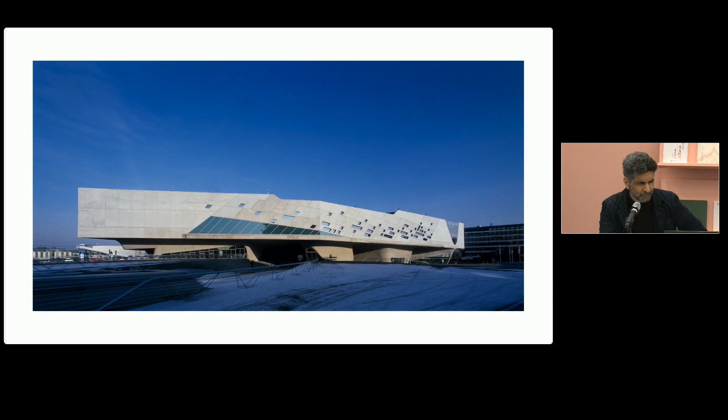A change did occur, and I suspect it's still prevalent, where our form-making abilities in the software went beyond understanding what the structure was, or is, or should be. Engineering-wise, those relationships in some respects divorced, so we had engineers effectively telling us: whatever you design, whatever form you design, we can make it work, we can make it stand up.

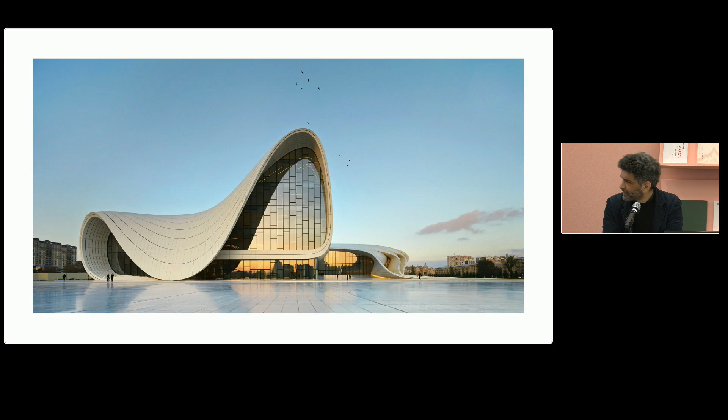I don't want to say I found it intriguing—I found it, dare I say, the beginning of something slightly problematic, in that we could achieve pretty much anything we drew. It didn't matter exactly what it did. If Hanif was here I'd tease him about it, because you can see on the next slide, we would create these fantastic structures, and sometime down the line would come superstructure and substructure that would then hold up the external and internal skins.

By that stage, it was already too late to integrate the superstructure. So you can see there, the superstructure is actually quite fascinating, but the skin has absolutely no relationship with it. In fact, a giant piece of substructure is already strapped onto the outside and the inside to hold up a skin that was never imagined as being part of that structure.

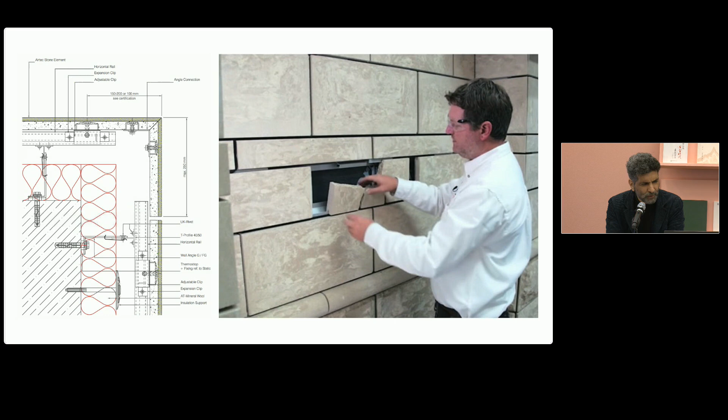All well and good—you scratch your head and think, well, that's the future, it's all possible, hooray. And you begin to realize that's pretty much everything, that's how we build today. Whatever form we create, even if it's meant to have a sort of historical illusion, ultimately they are skins suspended from superstructure.

Various offices I worked in after graduating also did this sort of work, and London is full of it—allusions to the past where there's a complete lack of knowledge, a forgetfulness. I'm not even sure we ever knew the information to forget of why those forms existed in the first place.

So the idea of tectonics driving the form. These are meant to allude to Victorian and Georgian 'warehouses,' really just clerks' offices, where the brick, stone, and cast iron, the performance of that structure, would have driven the size of those lintels, the spans, and therefore the form of those buildings.

But now they are just drawings—drawings that somehow are meant to represent or allude to the past. And as architects, we make beautiful drawings. They're effectively wallpaper, and some of our students will know I constantly criticize our profession as being highly indebted wallpaper artists. I've spent too many years in that training without understanding what the structure is behind it.

We create beautiful drawings, and they're suspended from structure. You can ask yourself, does it really matter? What's the problem, I mean?

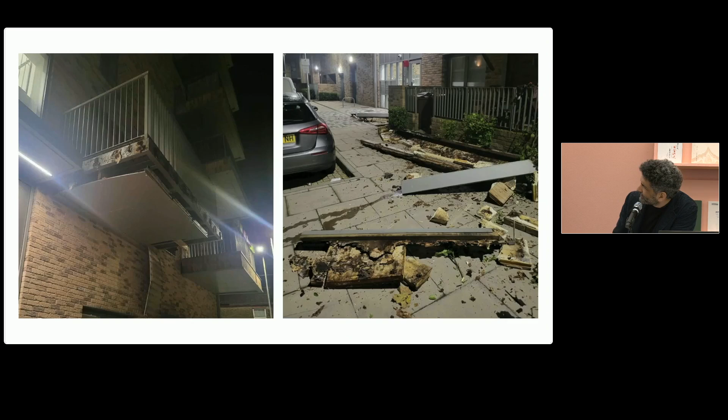Certainly this sort of thing—this is bits of brick plastered along, so you see from that previous slide, while 100 years ago, simply brick and stone would have held up that entire building. We're now creating superstructures in either steel or concrete and having to bring the brick from top to bottom. Sounds prosaic, but this is ultimately where I'm heading: we've forgotten that these bricks can hold up the entire form, the entire structure.

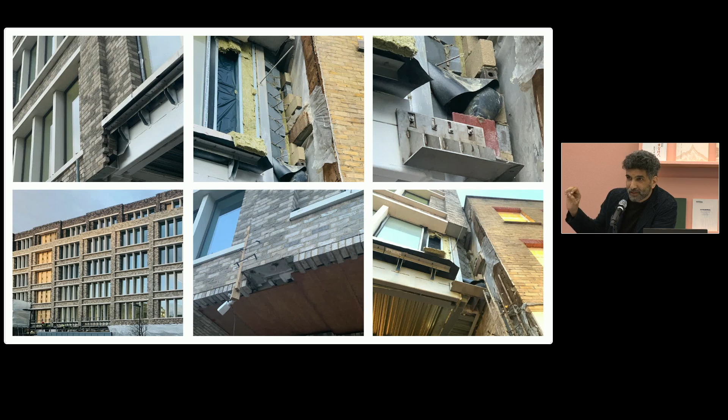And this is the origin of all architecture—the tectonics, the materials that architecture is made of, the stuff that we apparently draw beautifully but forget has mass and weight and structural ability, let alone its poetic outcomes.

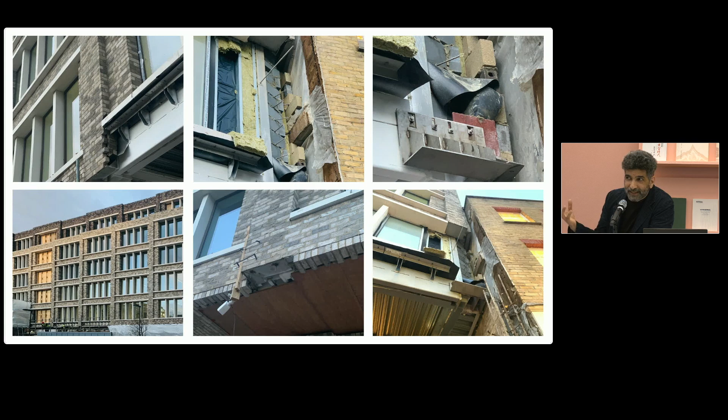And then these sort of things happen where balconies—the slab edge of the balcony—have actually been plastered with bricks, handed over to a subcontractor to build because the architect drew it beautifully and got it through approvals. The subcontractors then ultimately put it together in a manner that's clearly going to collapse and injure somebody. Obviously we've seen all sorts of other outcomes in the UK.

So it begins to suggest ethical outcomes. You begin to question: what does it matter? Who cares how it's built? Ultimately it looks beautiful, it's got approvals, everyone's happy with it, the townscape looks pretty—but are there any ethical outcomes to this?

You'll know that Richard Sennett was taught by Hannah Arendt, and the difference between the two is ultimately that Sennett believes your ethical purpose is in your making, your skill, your abilities—specifically for us as architects, that you'll be highly skilled, but ultimately you still have ethical purpose. You should have ethical purpose. To what end, otherwise, is this training? Is this skill development?

Ethics are laws. We negotiate them between us and turn them into laws, and some of them are legislated and some of them are not. They're fairly straightforward: structural integrity, fire safety, and so on and so forth, and of course, most urgently today, embodied carbon. The appearance, the style, is one of the least of it, because we don't necessarily have any ethical reason to challenge or negotiate with ourselves about how we dress, how we look, what our haircuts are, and so on. So it's the last thing of all the priorities we should be negotiating.

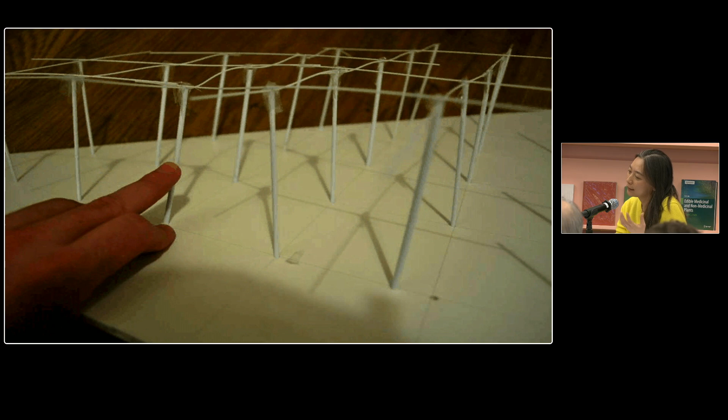So the first project we really used as a way to announce our practice was this PS1 competition that we won in 2010, the year after we started our office. It's called the pole dance. Here you can see that the poles are not the only thing—the system is not something that only becomes unstable through human interventions. It becomes elastic, but it's also inherently fragile, inherently unstable, and inherently indeterminable.

So it's a very simple installation. It consists of three elements: a surf mast base that's cast rubber with PVC pipes, and the poles as the column—the beams are this bungee cord. So all systems have this elasticity built into it.

And we worked with Buro Happold, asked them to calculate at that point the elasticity of the system, and they said it's uncalculable because the whole point of engineering is trying to take out as much unknown as possible, but you're asking us to do the opposite. So if we have a quantum computer, maybe we can do it.

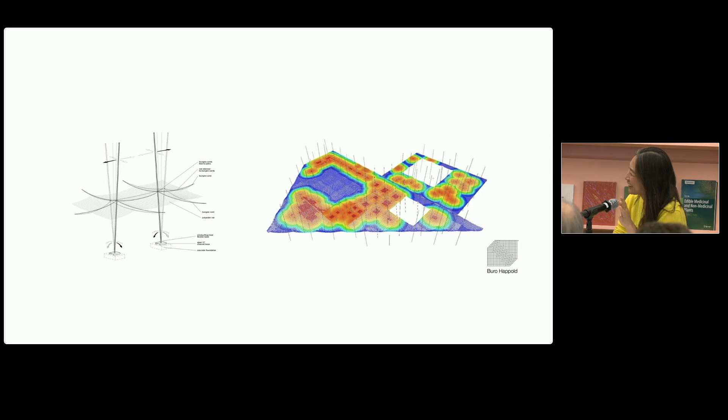So in the end, what we had to do is fake this very convincing looking engineering drawing of the stress test and present it to MoMA, but it's completely fake—to show them that, don't worry, the whole forces will resolve itself. But obviously, it's also a moment of playfulness, of defiance against this reality that we all find ourselves in, and not being crushed by it, but still instilling some kind of optimism and joy into the practice itself.

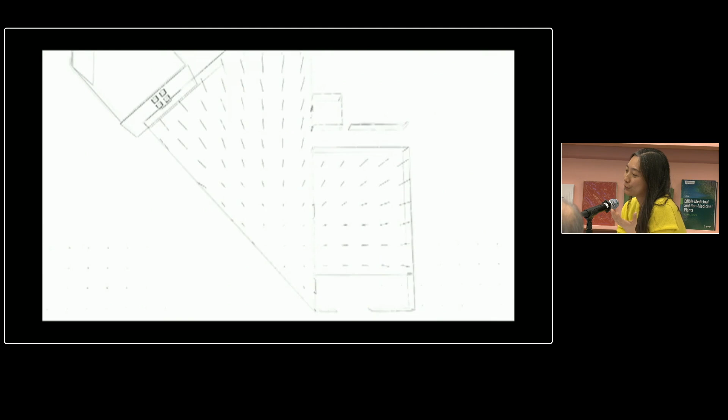We went down memory lane and looked at a lot of the renderings and videos that we produced, because as you start your new practice, it's very important to also find your own aesthetic language and representation language. So this was the early animation that we produced, and looking at it, it might not be very impressive to you now, but it was quite advanced at that moment to make this pole move, and a yoga ball fall from the sky.

These images were also to kind of find the aesthetic and the effect of something that's indeterminate and something that's not stable. Just how to visualize that was a problem that we very much thought about in representation as well.

So there are a few very elemental ingredients, and I already talked about three. The pizza is the next one I want to introduce, because it's impossible to construct this system with machines. None of these individual poles can stand on their own, so you have to hold them in place, then string all the beams, and then add the mesh together.

So we had to buy a lot of pizza for the volunteers to hold them for hours and hours while the whole system goes up, right? So also just thinking about such a simple elemental thing will create a lot of pushback and troubles that we have to solve. I think you're going to talk about the troubles you ran into with your project, right?

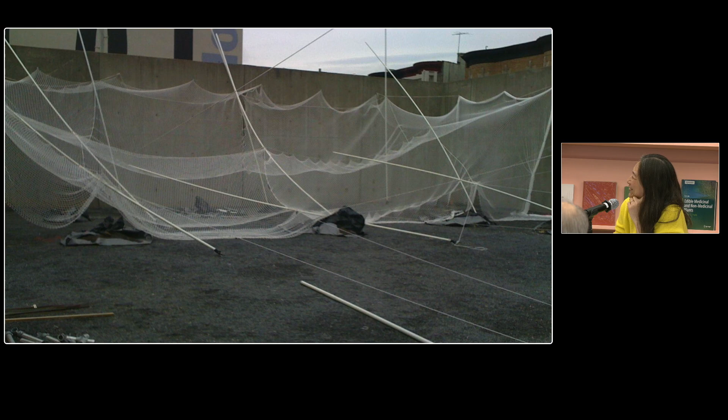Of course, it failed many, many times, and we had to buy more pizza in order to construct it again. Eventually, after probably 3 or 4 tries, we found the right way to put it all together. And the yoga balls have a really important function, because they delay the movement and make the whole movement not derivative of each other—it introduces another element of complexity into the whole movement of the system.

So it became really, really fun, but it's also an important first project to really think about what our role is as architect in the age of 2008. As a young person, you want to go way above and beyond, and with any small project you want to do more. So a bunch of other projects spawned out of that. We made an app, we made a drawing contest, we tried to engage globally, and a lot of graphic design and interactive design was experimented with as part of the project.

Thanks. It's quite odd, isn't it, jumping from one to the other? Okay, have to reorient you. Exactly, I have to reorientate. So we left. Well, actually, as Grace points out, it's funny, isn't it? You forget.

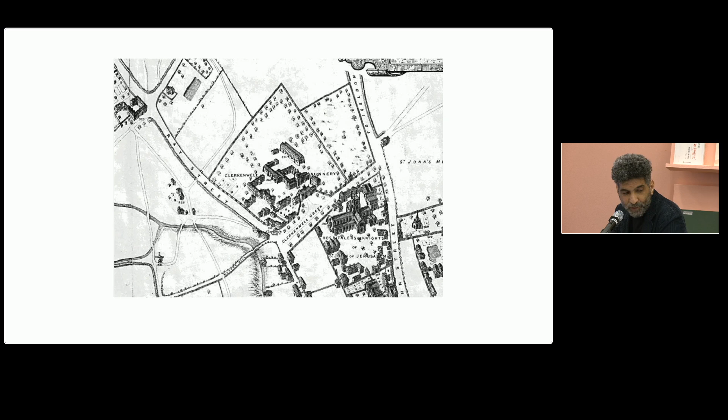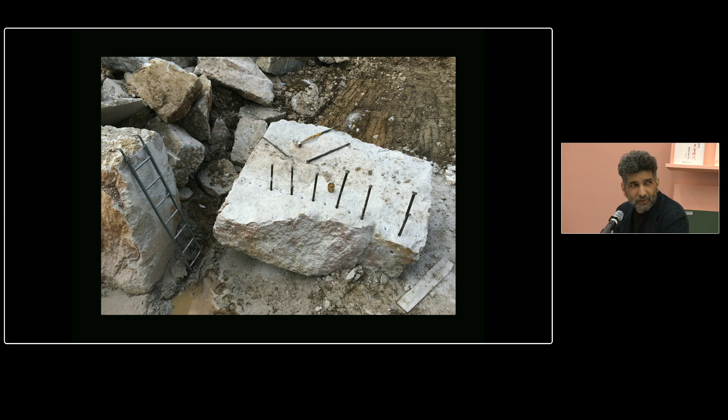Well, there are some ethical questions, and we can discuss that later. As soon as you hang a material from a structure, the structure has to get heavier. Typically, if you're hanging brick or something heavy, the structure is getting 30% heavier overall. That's obviously more material. What does that matter? It's more cost for the client, but it's more embodied carbon you're burning. And we ask the question, well, why are we doing that? Why are we still doing that? And of course, there's a long history of that. We can discuss that later, but Bötticher and Semper had exactly the point of crisis in the early to mid 19th century, that we're just drawing. Architecture had already been divorced from understanding our materials, and we're just drawing. Why are we drawing this stuff? How's it held up? And do we care about it? Does it matter? So these things are perennial, and they will remain perennial as long as we're not educated to understand the material properties, structural properties, and so on.

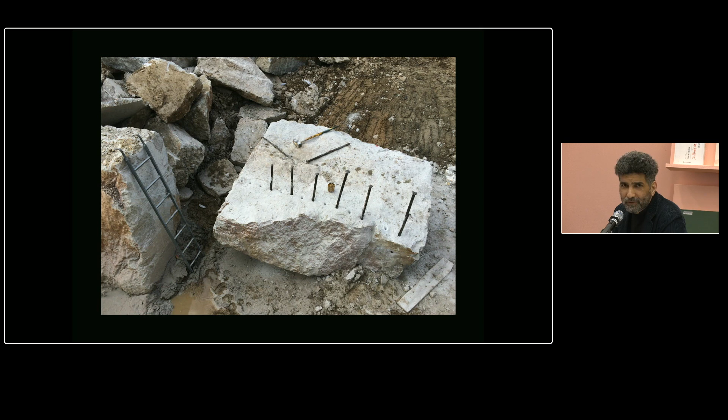So we decided to try and educate ourselves. Why are we building stone on steel and concrete frames as a veneer? Is that the most efficient, cost-effective, greenest way of building? And of course, the answer is no. It turns out we just forgotten how to build in stone. None of us visit quarries. We went to visit a quarry and quickly found out this is how it's dug out. These are the basic methods of cutting, drilling, splitting limestone, within which you find quartz pockets, fossils, and so on. But none of us know that because we tend to see it via salespeople giving us samples of small bits of limestone.

I realized, okay, fine, so we understand that it's cost-effective, structurally possible, and the dressing, in other words the contemporary way of using that limestone, can be as it's found in the quarry. How does it work structurally? Well, it looks complex, doesn't it? But this is a lot simpler than putting up a steel frame and cladding it.

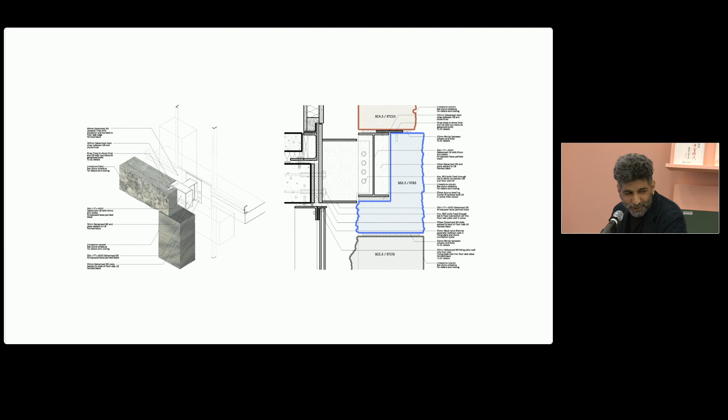We tested that, and you can see that as a form of exoskeleton, leaving the interior as what the 1970s termed loose fit. So there's no columns on the interior. You can do what you like with it over the years, turning it from residential to smaller residential units, hotel, office, and so on.

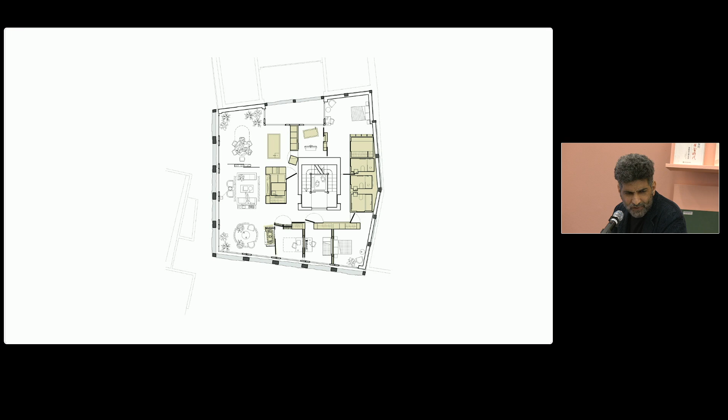And the interior then is entirely timber. So it's decisions on what those materials can do, not just for structural purposes and their longevity, but also their cost, and ultimately their poetic outcomes, specifically at ground floor level, the tactile areas, the things you touch, what Edward R. Ford might call the autonomous detail, as opposed to the articulated.

Climate. We're all now more than ever conscious of the impact of the construction industry on climate. Roughly 40% of annual emissions are due to us, in terms of what we specify, how it's built, how it's operated, and how it's reused or demolished at the end of it. That's 40%, quite significant.

Most of us would say, well, me as an architect, I have such little impact, such little agency, especially if I don't understand the nature of those materials. I've done a beautiful drawing, and the other consultants, the structural engineer and everybody else, are specifying them. It's them. Well, this is our argument about educating yourself.

There is something called the BSRIA University of Bath Inventory of Carbon and Energy, which lists all materials typically used in construction. Unfortunately, it lists them as kilograms of carbon per kilogram of material, not much use to any of us because we don't tend to work in kilograms of material, but we do work in volumes. It's not very difficult to convert mass into volume.

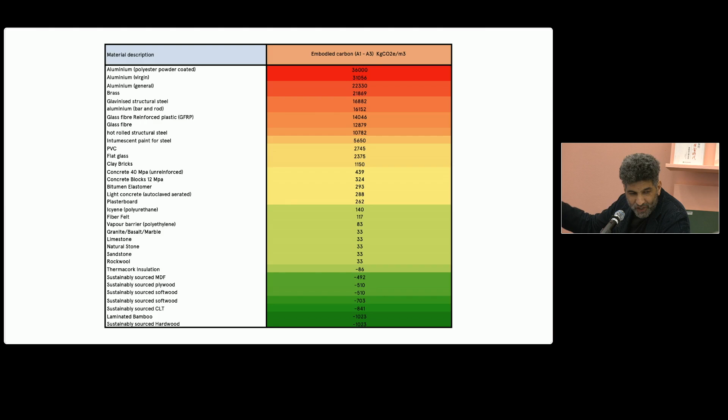So what we learned on Clerkenwell was then applied with that traffic light system on Finchley Road, which is twice the height. Instead of concrete and steel, where we could replace more of it, we did so mostly with cross-laminated timber, and then stone as well.

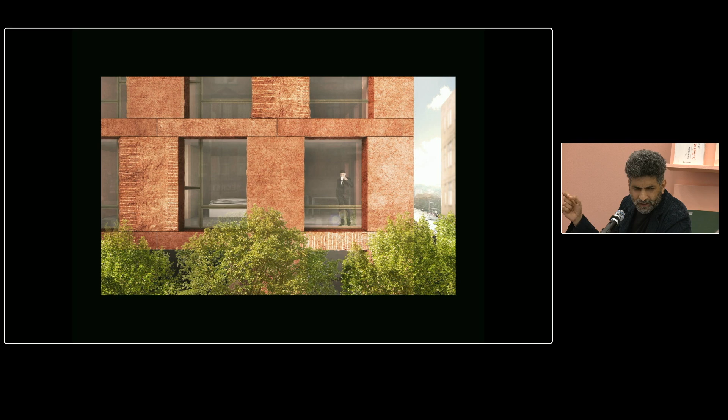Operational is about 43%—this is 2017 data. Every year, operational equipment becomes more efficient, which it does. So it's more and more important, the materials you choose.

Your early specification is why it's so urgent for you guys to learn about those materials, so you become—ultimately—you get agency in the choice of your materials and the outcome, and therefore the embodied carbon.

Now imagine if all of us had that thought experiment with that traffic light system of materials, and we all built in timber, 100% timber. You might have noticed, hopefully you have—I'm going to flick back again in case I haven't made the point clear—can you see at the bottom, the green has a minus on it? That's because timber is carbon sequestrating, as you probably understood from your forestry studies.

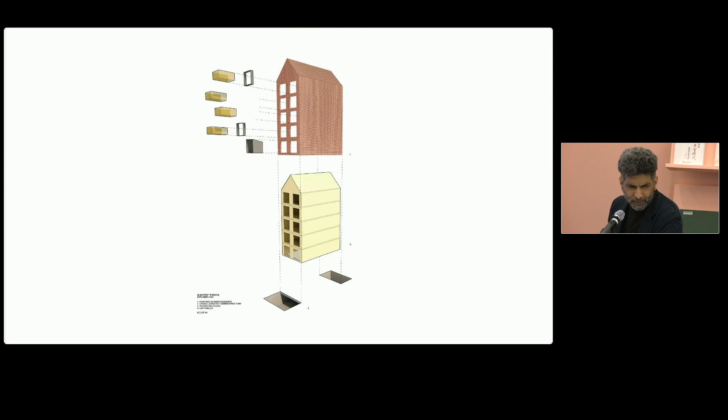So I'm labouring the point about getting yourself educated about materials for all sorts of reasons. Here's a brick version that's carbon negative, where the superstructure is CLT and the brick aims to be as low in its embodied carbon as possible. I'm going to race through these slides because I am labouring the point.

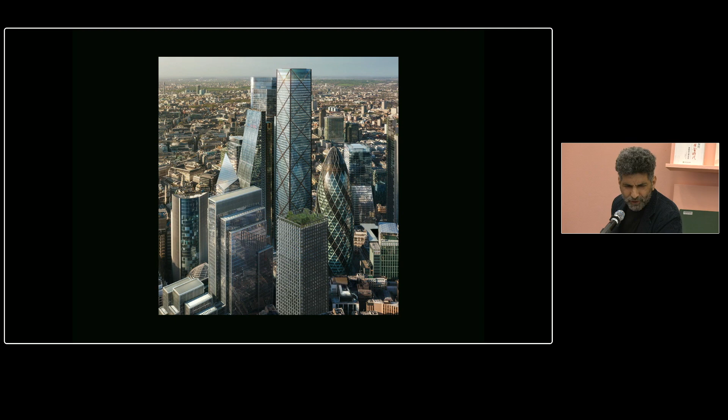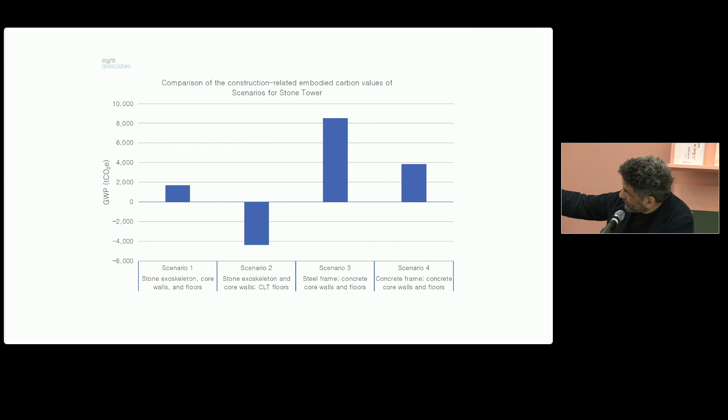Canary Wharf actually asked us to do a study: can you build a tower in stone just like Clerkenwell Close? We hadn't tried it. With our engineers, sustainability engineers and cost consultants, we found we could. If you look carefully, on the far end is an all-stone version - the floor slabs, the columns and walls, everything is stone. Its embodied carbon is a lot less than the steel version, the steel frame, second from the right, or a concrete frame version. But the one that's gone negative is where we've put timber floor slabs in - cross-laminated timber floor slabs and internal partitions all in timber.

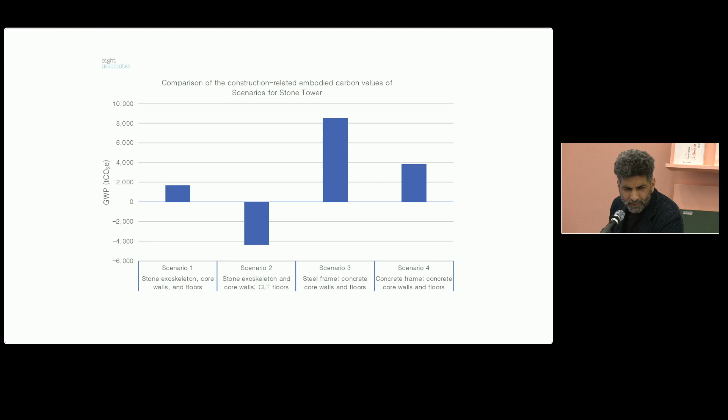So there's a demonstration that if you're careful about your choice of materials, you can get the same outcome in terms of your building form, whatever illusions you're after, but it's carbon negative.

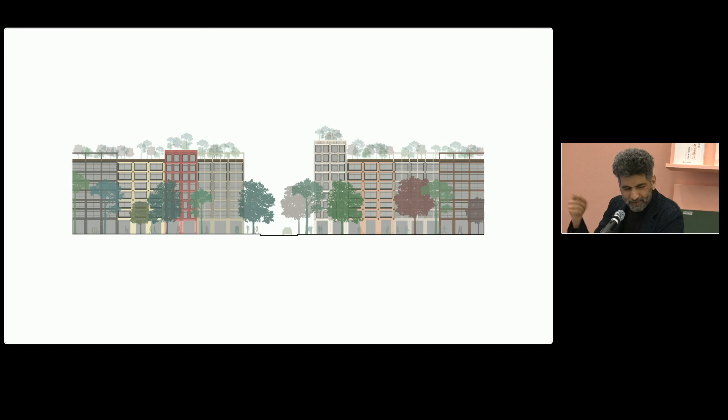What we find again - I'm going to race through these because I'm conscious I'll end up swallowing too much time - this isn't our work, but we get asked by, because you develop a level of expertise, significant developers, larger scale developers, what can we do about our master plan?

So we suggested, look, at the moment you're getting BREEAM Platinum, the highest possible level for your office buildings, same with the residential buildings on sustainability. But you're still building exactly as you did 30, 40 years ago. How the hell are you getting BREEAM Platinum?

Well, unfortunately, you can tick boxes saying, I have considered using CLT. At some point I dreamt about it in the middle of the night - a terrible nightmare, I had to use CLT. I've ticked the box, and that's good enough. Then all my timber doors are actually sustainably sourced - bang, you've got platinum.

Most of us don't have a choice. We hand this information over to the sustainability engineer, and bang, we've got platinum. But the reality is the building is no different, really, from 30, 40 years ago.

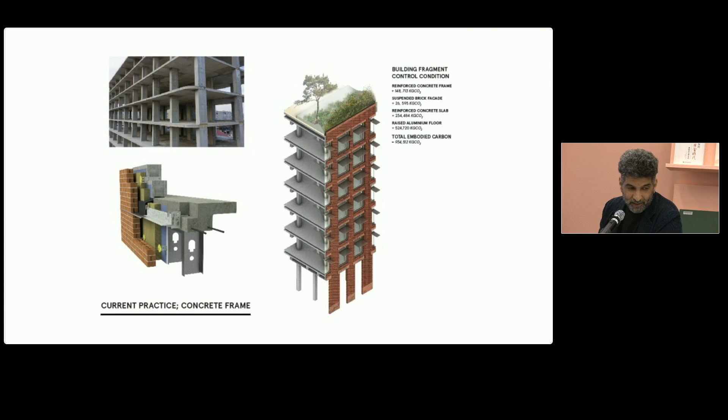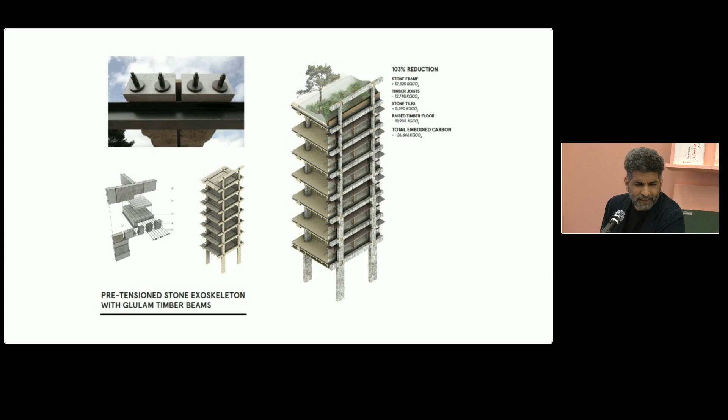So if we make the decision we can substitute those materials for stone and timber in a cost-viable way, because ultimately that's what clients are bothered about. They have to borrow money, and we don't want them to spend twice the amount, otherwise it wouldn't happen - they'll just revert back to steel and concrete. If they can do it, then why not, in terms of cost?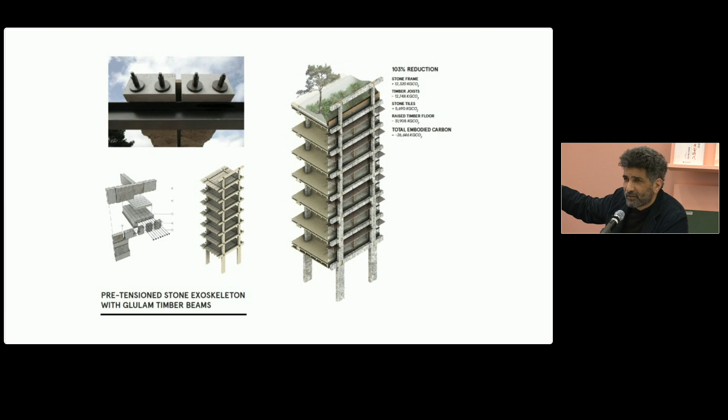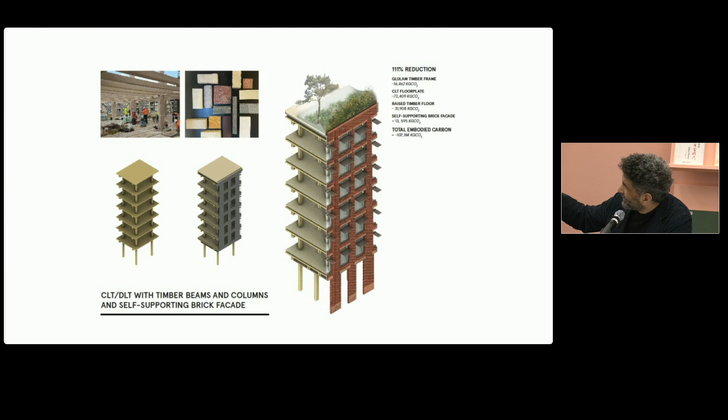You can see the reduction in embodied carbon, where 103% basically means it's now negative in its embodied carbon compared to had it been a steel or concrete frame, and so on. The more timber you use, the better. So that's entirely where the superstructure is actually glulam and CLT floor plates, and then it's a self-supporting brick skin.

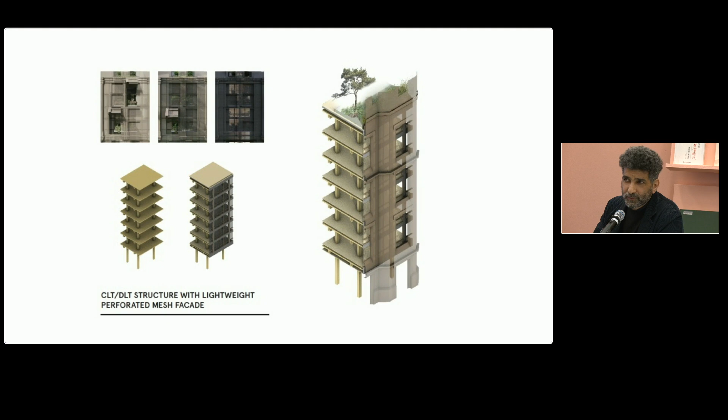So these are examples we give to those developers as everyday architecture. It's not necessarily what we do, but it's everyday architecture, so you can do your master plans and ensure the entire scheme is carbon negative.

That's more of the same, really. Is that you? Yeah.

I'm going to take this a little bit slow because the second stretch of my presentation is still a bit in the past, but a lot of this is about the conversation, isn't it, with the people who make it - like your stone supplier who didn't even know what the matrix is of the materials he's been dealing with all his life - and talking with clients, developers, urban planners, and so on. So if we want to change anything, conversation is probably the most invisible but most important ingredient in that project.

This is maybe a project where we started to realize that those kinds of conversations are the most important ingredients to push the boundaries of architectural technique and expression. And I had this logo on - I don't know if any of you can recognize this at this point, but it's Alibaba.

So this is a project that's also defined. The reason I put all these different apps in the slides is also to remind ourselves that we're very much a product of our time, of the tools and the systems that we're born into. And this project was very much enabled by Alibaba, which used to be this enabling platform.

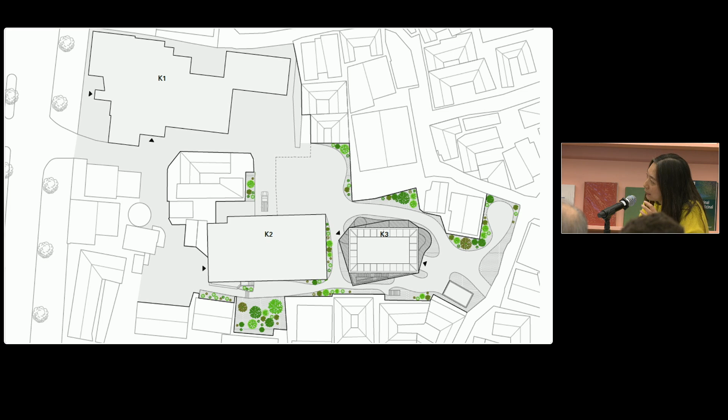The K3, really deep into the historical neighborhood. So we were given the footprint already, and rather than thinking about dressing up this given gallery box with claddings and paint jobs, we thought about how the elemental volumes of the programs—both the gallery as well as accessory programs like vestibule, HVAC box, staircase and so on—

can just be quite matter-of-fact, exist on the site, so that there is no fluff that makes it even consume a bigger footprint. But then, as well, how to make this quite diagrammatic, brutal and crude expression into something that's more crafty—and maybe the form is not something that we find in a computer, and it's not something predetermined, but it's really determined by the volumes of the program and the function itself.

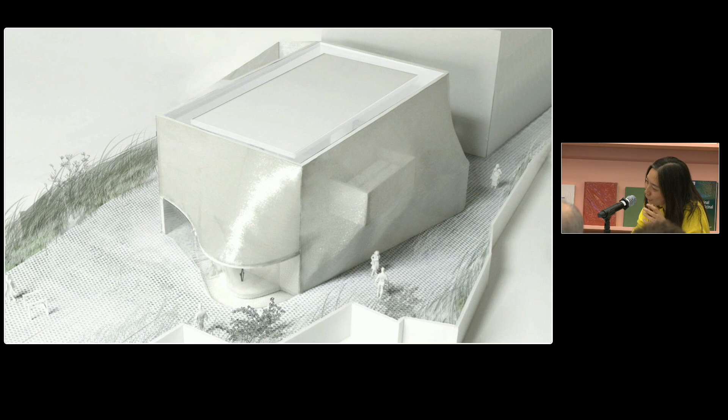So we wrapped the entire building with this chainmail mesh, and this model is made out of stockings. And when we presented to the client, she just literally lowered her sunglasses and said one word: 'I like it, please make it,' without even asking us what it is. And that was the best design meeting we've ever had. But then we were left with the problem of figuring out what it actually is.

This is stocking that becomes an architectural material. So we thought about it really, really hard, and finally this gave us the inspiration that there have been materials like this used on the body of people—something that's quite robust, protective, structural, with potential to be structural, but also pliable and able to adapt itself to the situations it finds itself in.

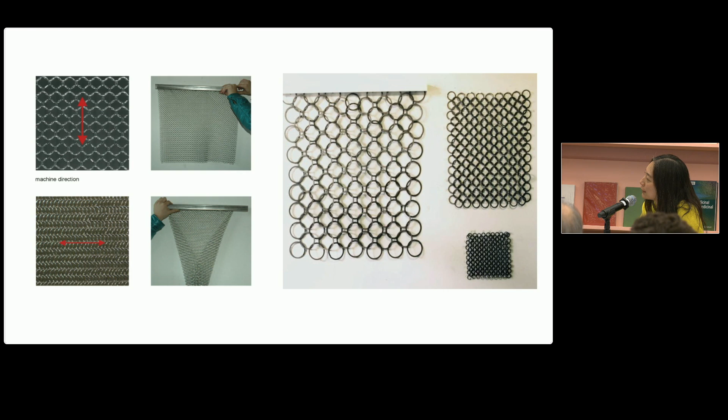Still, the challenge is how to scale it up to a building scale, because this is not something that exists as an architectural material. So we started to make models, trying with cardboard rings to figure out its behavior, its stretchability in different directions. We worked with the facade engineer to really test the behavior of the stainless steel rings, the single rings.

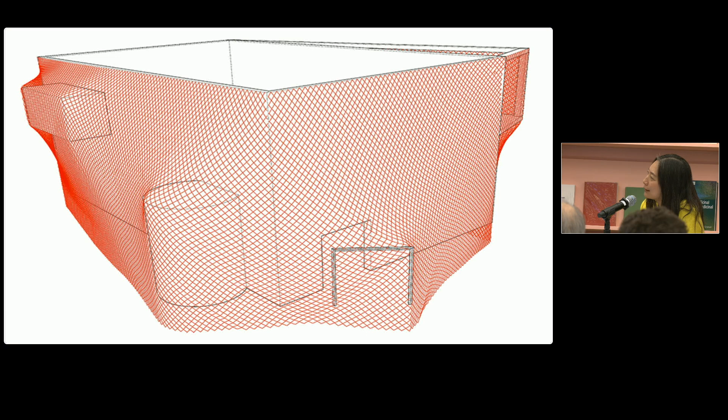And this time, this is actually a real engineering map to figure out the stress distribution over the entire surfaces. And then we understood so much just digitally and informationally what this thing is, but it still doesn't exist in the physical world.

We knew that there is a translation that needs to happen between the digital and informational and the physical. So we bought this really big chainmail mesh, the biggest you can buy on Alibaba from India, from sellers that usually sell belly dancing equipment. They were wondering what we were doing with this big piece of chainmail mesh, but this is a 1 to 10 scale model, the biggest we could produce with the market.

There's no school in the city. There's no hospital in the city. There's only one hotel that doubles as a brothel and restaurant, where we had to spend a lot of time. That's the reality of manufacturing for the whole world, at least in the stainless steel mesh industry.

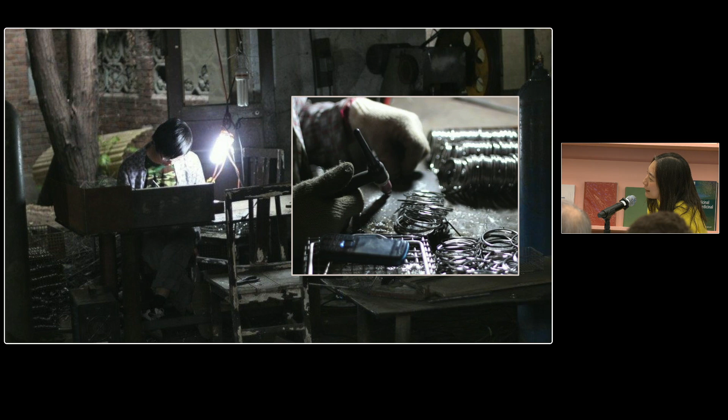And we found that our very promising mock-up, the first mock-up, was produced by this young man who was welding this by himself the whole time.

And then I started to talk to the boss of this workshop, and he looked at me like I'm crazy when I said, we sent you the drawing, this is for architecture, we need 500,000 of this within 8 months. And he said, no, you came to the wrong place. And I said, no, if you guys cannot do it, I don't think we can figure out any other place that can do it. You look around, everyone in this town knows how to weld, and they know how to deal with metal mesh. So why don't we do it together?

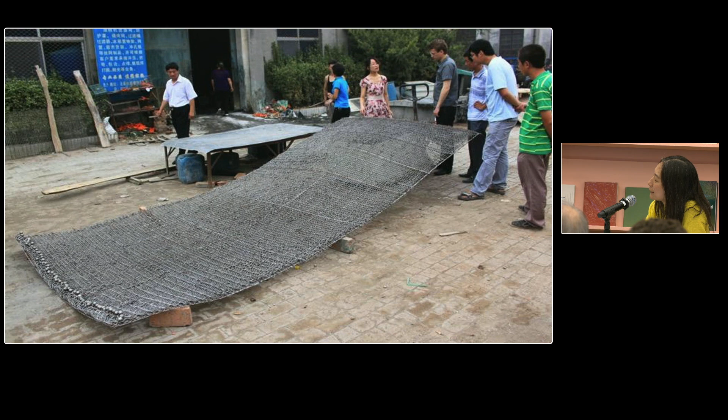So it took us a lot of convincing. And so he got his cousins, his niece together, and probably 5 workshops all got together. And we invented the whole way of scaling up the production of this and quality control, rented the car wash place in town to process the finish of this, and used the local schoolyard to make our first big-scale, full-scale mock-up. And the kids were our inspectors.

And in the meantime, the concrete structure was going up in Korea, so the whole box and everything is just a really simple concrete volume, which is the primary predominant way of building things in Korea. And then we got a lot of the stainless steel mesh arrived on site 8 months after we arrived in Anping.

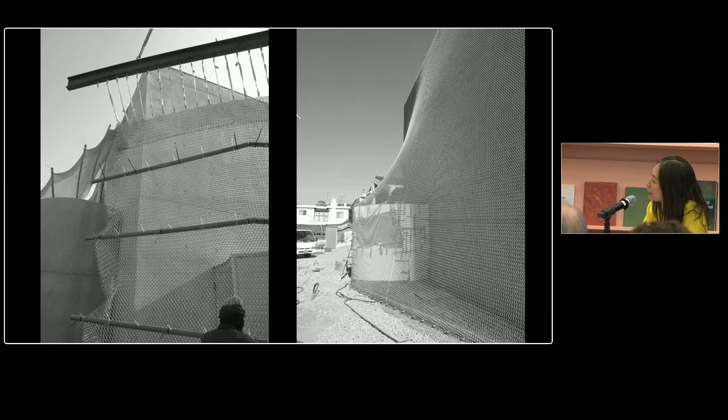And it was one of the coldest days in Korea, so you can see that if you didn't wear gloves, the hand skin would actually be stuck to this metal mesh. So the whole construction, again, meant we had to invent the whole method, the whole way of even installing this.

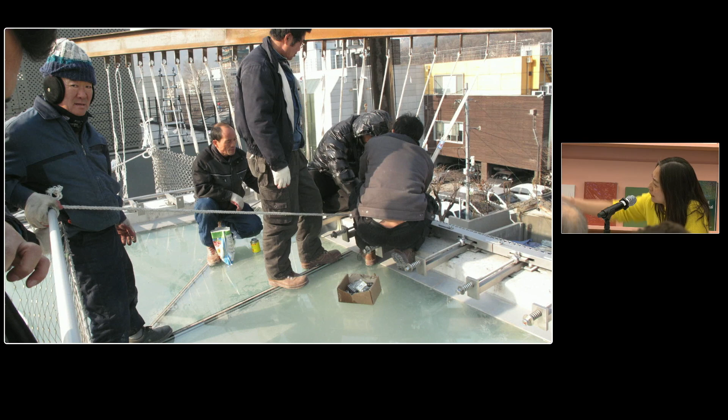This time we didn't need to buy pizza, we just got a crane and stretched this mesh from the top. There's all these springs around the perimeters that you can tension afterwards, after the mesh was anchored and secured at the bottom, and then you tension it at the top, so the entire skin becomes one garment, basically, that is welded on site.

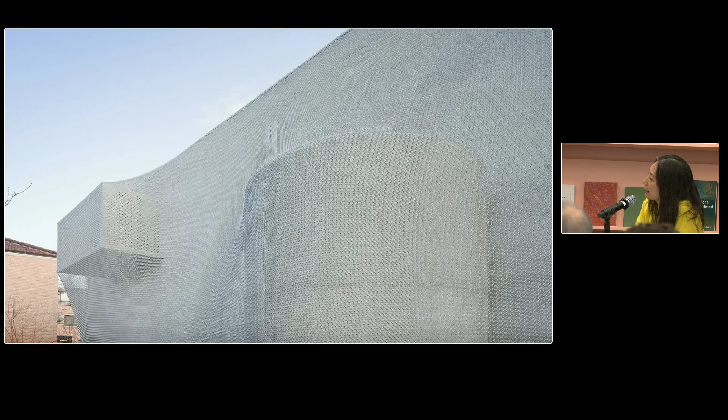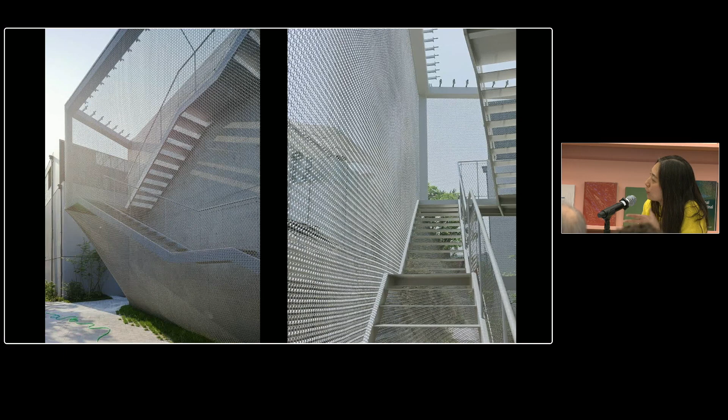There's 16 of these panels that are hand welded on site, but because the way you weld on site is the same way as you weld off site, at the end of the day it becomes a seamless one piece of garment wrapped around this entire gallery space, creating an in-between space between the functional programmatic concrete volumes and the exterior expression.

And there's a handmade quality to this that had a really great dialogue with the Hanok homes, these traditional homes around the neighborhood.

That's rather beautiful. Right, I've got to get my mind around it.

Okay, future. Someone's tied this... this is different uses of stone. The Italian government essentially paid for some research - there's still a big stone industry in Italy, and a vast amount of it is waste as a result of cutting stone into smaller slivers. You get a lot of waste from there, currently in sort of mountainous piles. What can you do with them?

So essentially you can make terrazzo, a sort of form of terrazzo. The expectation was you'd just make tiles out of it and sell it as flat tiles, but if you're actually putting it back together with an agent, essentially a glue, well why not put it across a piece of formwork so by the time it sets, it becomes self-supporting, a piece of structure.

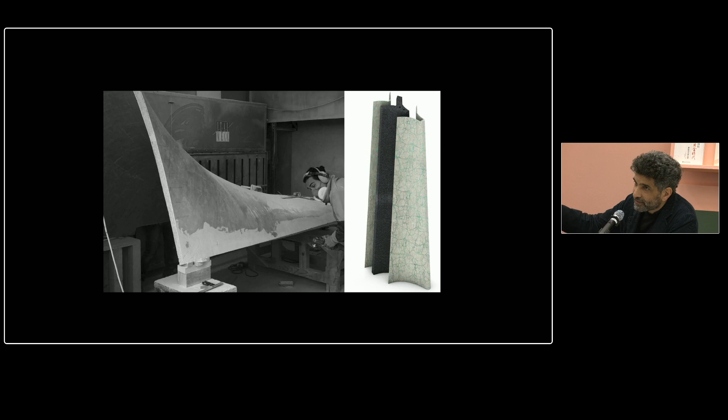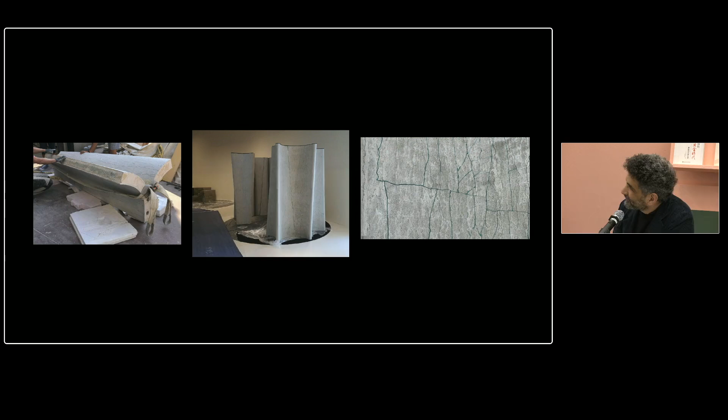So our first attempts - keep an eye that this is two layers, inside and outside, with insulation in between. So it's external finish, internal finish, and insulation in between. I think this actually went to Korea. Unfortunately COVID meant we couldn't go visit it, and then it couldn't come back, so it was destroyed.

But our first attempt went to Venice, which was just a single layer. This shows you that if you put it across a piece of formwork it's self-supporting. It could be its own roof structure, its wall structure, and so on and so forth.

Simple stacking - just taking blocks and stacking them. So the least amount of work you need to do, the least amount of energy you need to spend.

So you can replace all your precast concrete floors, or even metal deck with concrete on top, with pre-tension stone. So it's still - there's metal in it. Remember, we're not saying we're eliminating cream cakes and bacon, it's just about reducing it in the diet. So it's pre-tension floor plates, beams - some of them are sort of 18 meters long.

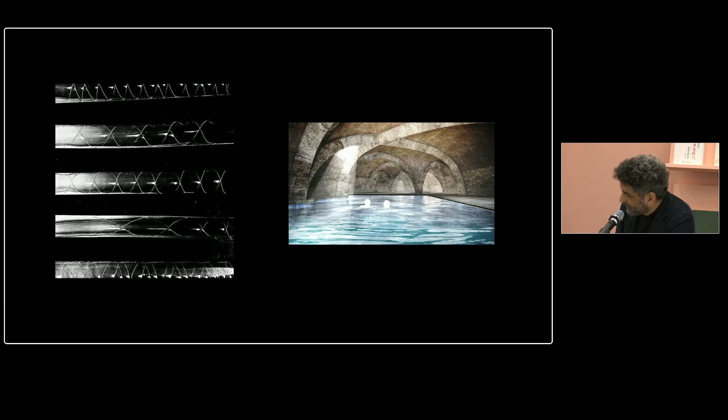But we started off with our structural engineer, instead of using a bit of software, taking balloons and just playing with bits of string to see how what are effectively rib arches behave, with the bulbous areas being their vaults. And that's where that previous technology came into applied reality.

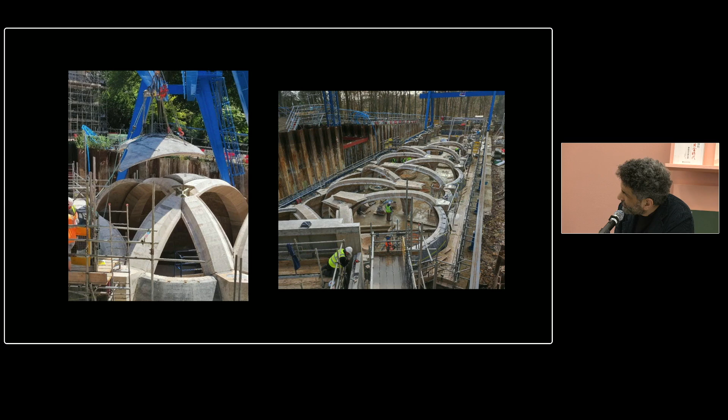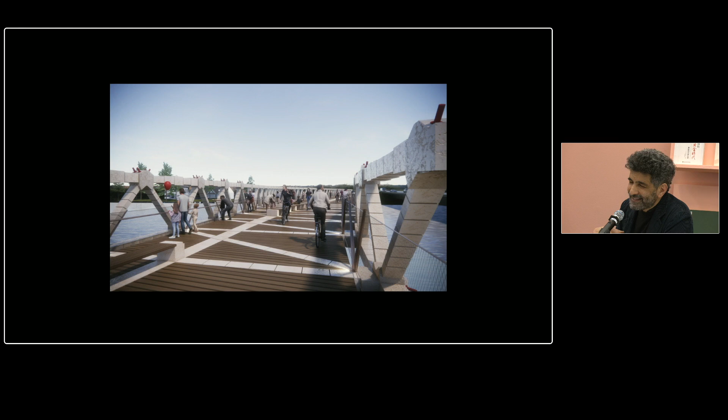We were asked to look at a footbridge, and this is where the stone becomes slightly a bit of a fetish. We were asked to look at a foot and cycle bridge, and you're thinking, well, it's a 90-meter span with 60 meters in the center of it. Is that right? 60, and then I think it was 15 either side, something like that anyway.

Could we do it all in timber? The answer was probably not. Can you do it in stone? Yes, if you pre-tension it.

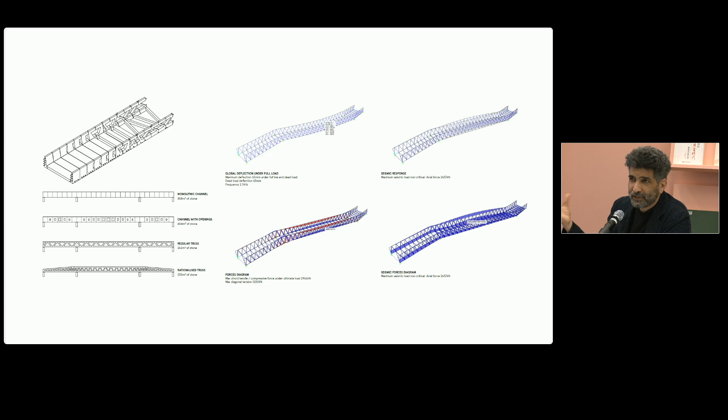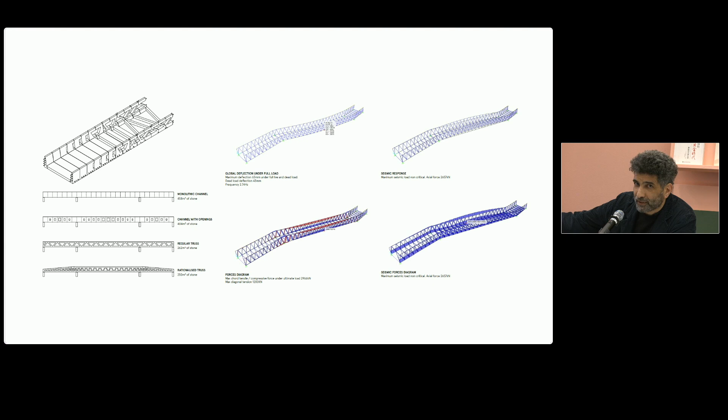And if you look at, again, on the left-hand side, you can see one where it's essentially a U-beam. You have a U-beam structure in stone, but then clearly you don't need all that stone - in some areas there's more stresses than others, so you can remove some of that. And if you take it to its natural conclusion, it's effectively a truss. So we thought, well, let's take it to its natural conclusion and see what happens as a truss.

It is a bit brutal - this is in Graz, in Austria. The burghers of Graz said, a stone bridge? Why is it not steel? Who builds bridges in stone? And you have to sort of scratch your head and point at the bridges that exist in the town - the last few hundred years, it's all stone.

Nevertheless, it was a bit of a challenge for them. And it's got a sort of bend in it, which surprised us. I'm going to take you through a number of... this makes it sound like we just do stone. Not sure why it's all stone.

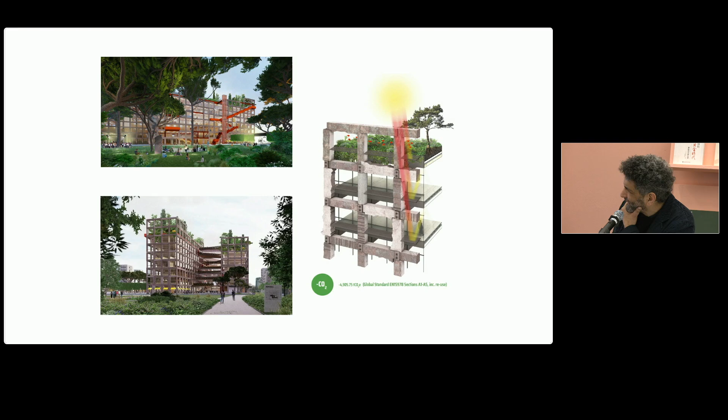A reuse project, where you're reusing parts of a series of warehouses to create this library in Milan, not to be built, unfortunately. It's partly this idea of spolia. If you look carefully, there's found bits of stone as well as new stone, found bits of metal from the warehouses being demolished. We're all interested in reuse now, but the ancients, the Greek and Roman ancients, would have called it spolia. Whatever stone we find from ancient temples, castles, and so on, we reuse for our contemporary purposes.

Here's a non-stone version, a non-stone scheme. This is a site in central London that was bombed and stayed empty until about 5 years ago. Our client bought it and held a competition.

He's very brutal, and said, 'Look, for 2 weeks I want you to come up with some ideas. I've hired Libeskind. Well, hopefully some of you know Tony Fretton. So it's complete opposite ends of the spectrum, and yourselves.' That's nice, and yourselves - I'm not sure what that means, but thank you. You got 2 weeks to come up with an idea. God, this is absurd. But anyway, we had a go.

Notice how it's a sort of weak version of a Palladian villa with a central piece, a wing, and one of the end pavilions that was bombed out. Really, the terraced shops and the shop owners would have lived above.

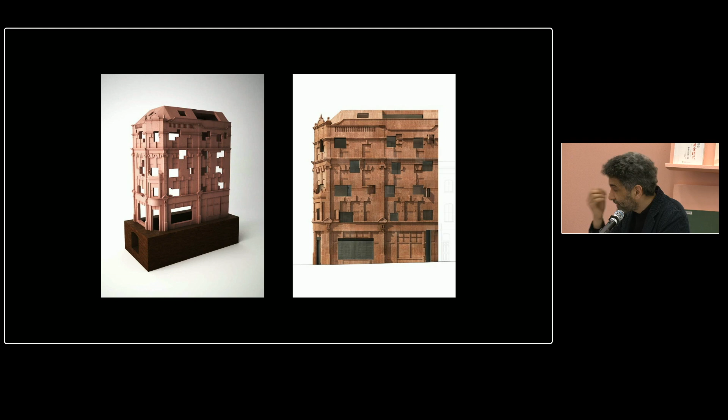It's an interesting discussion on nostalgia. We all have it - I think wherever we are on the planet and whatever age we're at, we have a suspicion that something in the past might have been better. It's obviously a stripping back, isn't it - a stripping back of narrative where, like monument building, you idealize something, you put it on a pedestal. It's an ideal, but it's actually an editing of that reality, of creating a new narrative. And it's that question of who is in control of that narrative.

We realized if we suggest that we're rebuilding what was on site, clearly we're not going to - you can't actually rebuild, you can't meet all the modern regulations in the way we built in the past. It's not going to be an authentic reconstruction, but let's just talk about the idea of why we have those motivations, and why does that building not take on that argument.

So this is a casting - a cast monument of that past, of that Victorian past. The idealization that the Victorian past is fantastic and we all need to rebuild that - that's what our councils are telling us, rebuild please.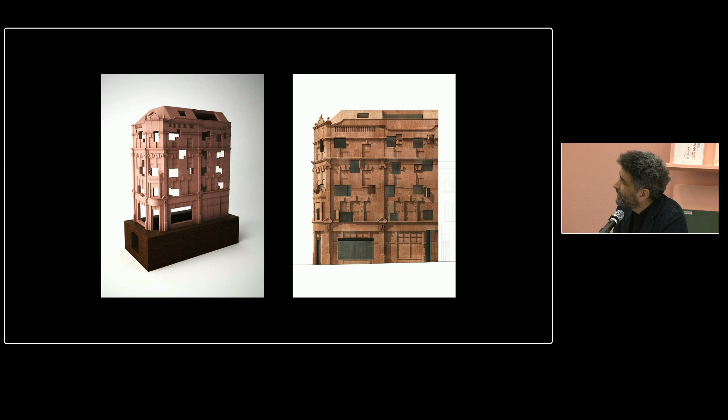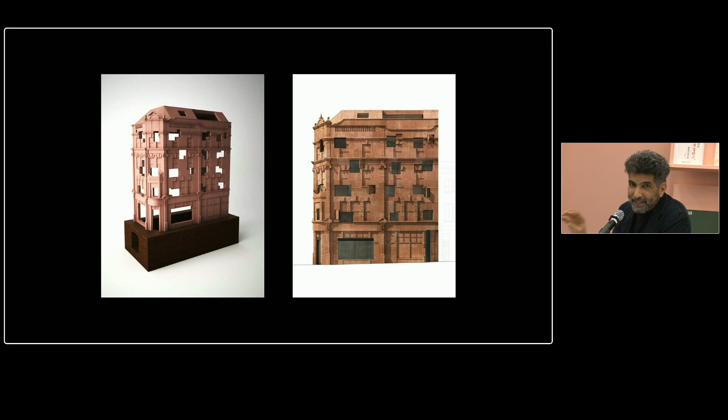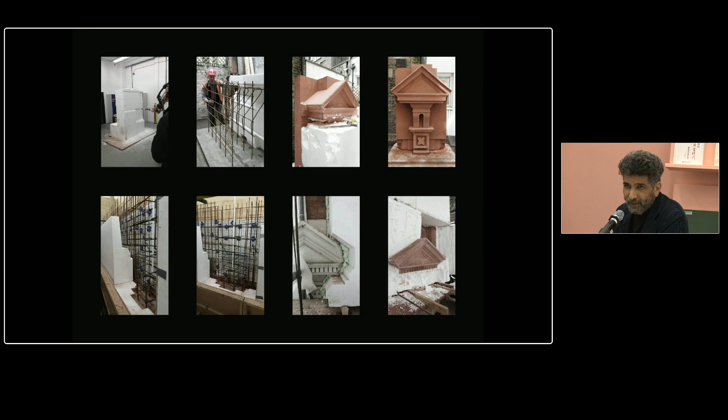We explain to them, we're going to choose a material that is in situ, poured on site. The nature of that material itself will have flaws, and then the new inhabitation will begin to re-edit that, as it were. What does that mean? Ultimately it means you're creating a sort of terracotta concrete mixture that you're pouring in situ on site in day pours. You have to create formwork for it. I won't tell you the long story of how we convinced our client to do it, but it turned out to be viable and possible, and he was happy with it.

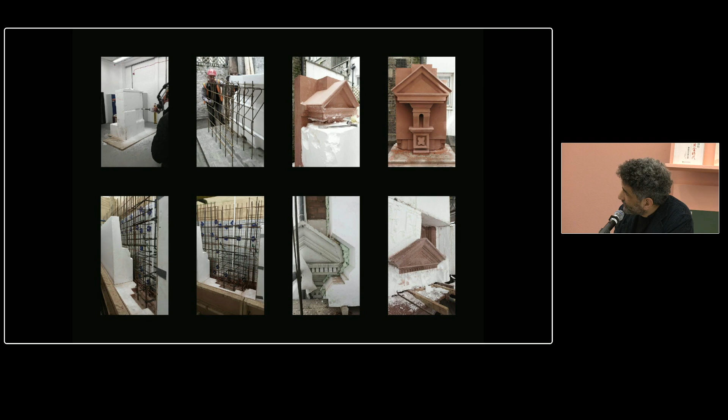Contractors are highly concerned because they're convinced architects want perfection, and we explain to them, look, the formwork on the outside and the inside is going to be flawed in its own way. We're going to take a point cloud survey of the pavilion on the other side of the terrace, flip it in CAD, and then slowly break that up into day pours, turning it from a CAD model into a routing model. The routing tool, just translating it from a CAD model to a routing model, is already going to have its errors - it's a fairly cheap routing tool. We could get a smaller one, which would be double the time and therefore double the cost.

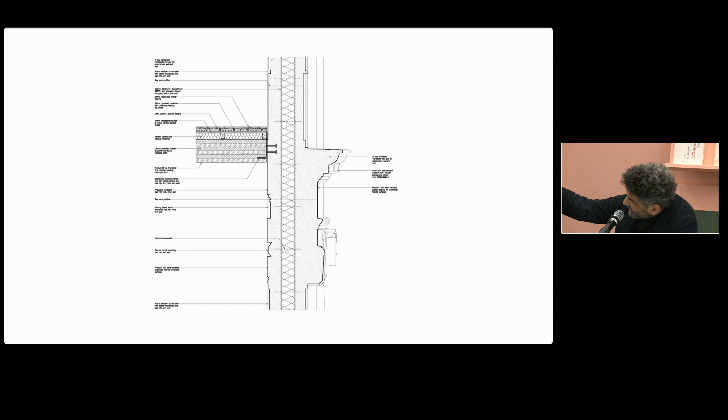So whatever today's cast is, it will have its flaws as it cures. And when you begin to pour this material in, it will have its flaws. Please do not try to correct those flaws. If you look carefully, there are two walls with insulation between, tied together. It's the superstructure, then there's CLT, and everything else is timber. The flaws are intended, but the contractor didn't believe us and kept trying to repair them, so we just let him do that.

So ultimately, it is the idea of this flawed narrative of monuments. The German word for monument is Denkmal, which is a far better way of thinking about monuments — think upon me, look upon me and think. All monuments are ultimately flawed.

I'll race through this — apparently I've got a minute. Yeah, this was one more project, I think a more recent one. One of our students is looking at something similar. Where is he, Michael? Is he here? He'll be told off now for not being here.

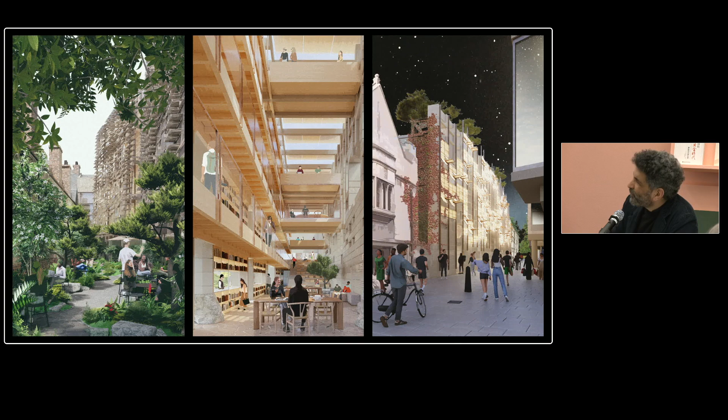One facade is — we're done. Anyway, stone and timber, I think that's it. Oh no, there you go.

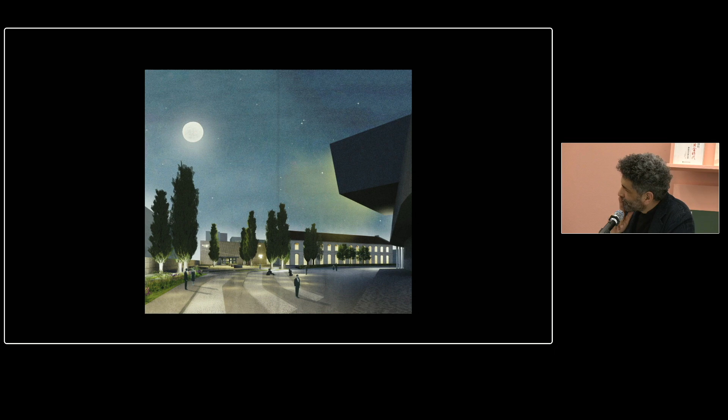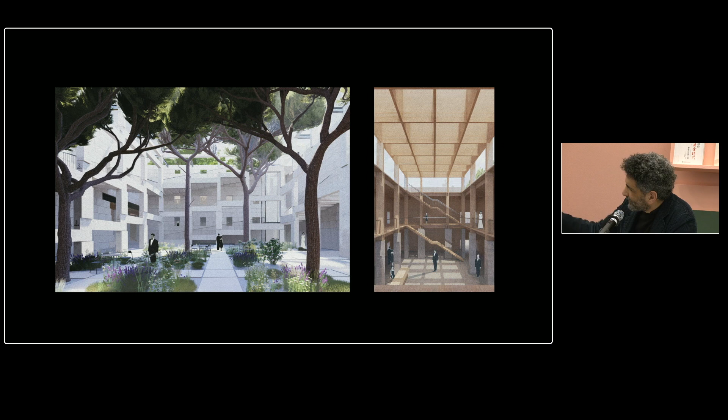I'm finishing on this — MAXXI. So I started off on MAXXI, a project I worked on at Zaha's. This is a competition for MAXXI where we started with the idea of a Sylvia Plath poem about the moon, about unrequited love and somebody taking all the attention, for a research facility that's part of the museum. So it's this journey from that relationship between the two into the research facility. Oh, there you go — that's the end of it.

Do you want me to still do it? Okay, I'll race through it as well. All right, let me see. I say one word per slide — ChatGPT, context collapse.

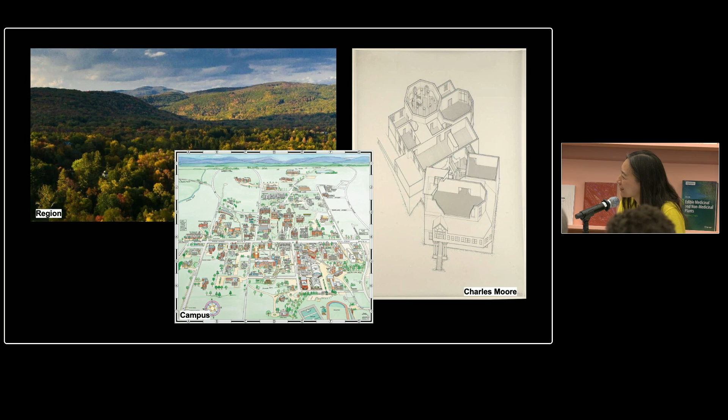Charles Moore campus region — a project that has to engage with a whole complex dialogue, conversations, and social construct in the middle of the woods in the Berkshires, but this kind of timber hasn't been used in the last, I'd say, 50 years. So we looked at different ways of constructing the site and the volume on it. Ultimately this whole design process, as you'll find when you enter the profession, gets pushed through an entire slew of conversations, stakeholder engagement, workshops, and so on. Often you get thousands of pieces of feedback from many different people, and somehow the architecture has to synthesize all of it. So ChatGPT is actually quite useful when you have over 1,000 pieces of feedback from many different people, just to understand what you're dealing with.

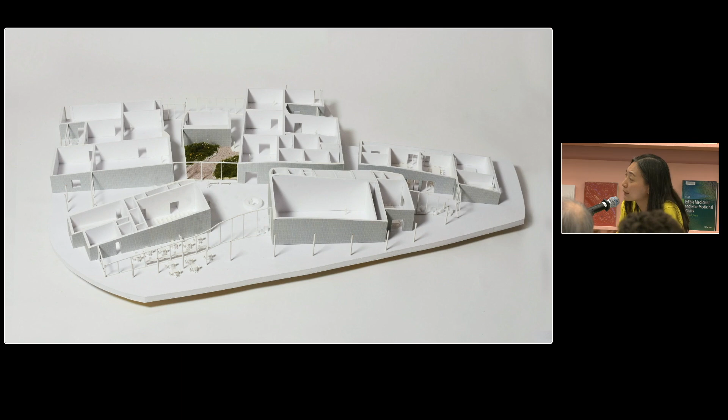Ultimately it gets pushed through this process and becomes something that really distills the essence of the project — in this case, a museum for Williams College, the first purpose-built museum after Charles Moore's expansion. We decided to push all the gallery space to the back, and in the front is all the pedagogical and education programs, like the research center, classrooms, and auditorium. So it's a museum, but really kind of a museum disguised as a student center, enveloped under this big pliable, soft roof that I'll talk about. This roof also has a porch wrapped around it, so it's not really the wall that greets you, it's the big roof that greets you.

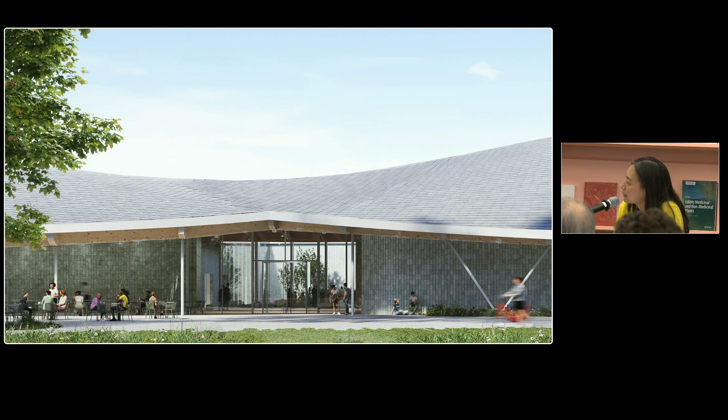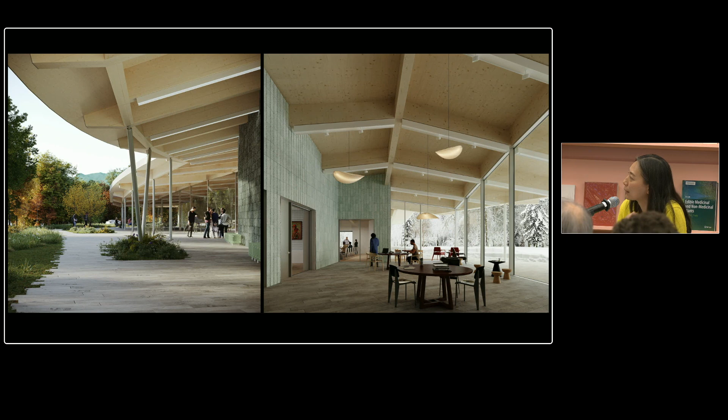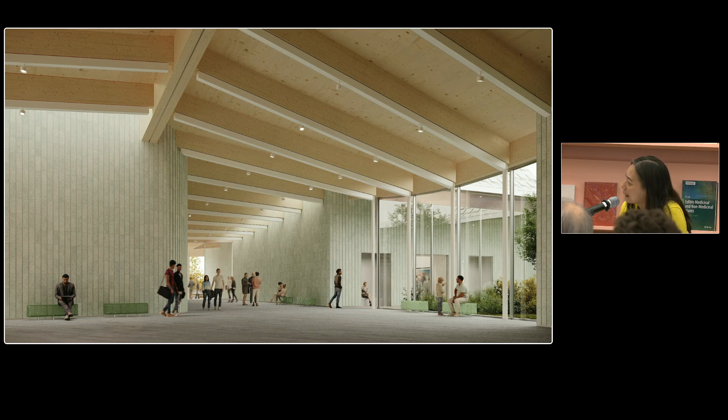This entire roof is actually the main structure of the building, made out of mass timber. We're quite promiscuous with materials, so whatever makes sense for the project, we try to push as far as we can. The roof has a quite articulated form to be in dialogue with its surroundings — the rolling hills of the Berkshires — as well as producing different ceiling heights within the building, since there are different programs and gallery sizes that need different ceiling heights. So it's a negotiation between inside and outside, without it becoming cladding and structure separate from each other with mass timber. We pushed for LBC core certification for this building instead of LEED or BREEAM or others, because a lot of sustainability thinking is just ticking boxes, and we feel LBC core is currently the most holistic way of balancing embodied and operational impact, as well as human-centric wellness and how you deal with the site together.

So this project is all mass timber in its main structure, and the masonry is self-supporting. The mass timber itself creates a warp on itself. There's a feedback loop between the material behavior that runs through our entire project, and the form finding as this back and forth loop. What we did is study with this large span CLT, if you just support it on one corner, how the flat surface would, by its own self weight, start to deform. Rather than having the structure counter that deformation, we work with it to create rolling surfaces able to accommodate the different ceiling heights of the building.

So embodied carbon, we did a lot of studies and really pushed the university, the college, to adopt this slightly 20% more expensive structural scheme, but hopefully this building will stand for another 100 years, and that would all pay off over time.

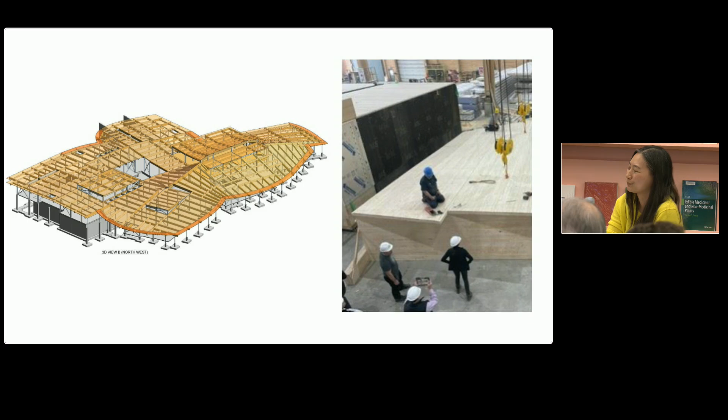Thank you. I think we have some time for questions, and I know that there are many.

It's always striking to me, sometimes when we put together these pairings for the position series, we never know how they're going to quite turn out, and I'm always really amazed to see how many fascinating intersections we could find between two people who don't know one another. You didn't know one another, and you didn't know you would be paired together. So this is really fascinating.

It strikes me that both practices began at a moment when you were thinking, and coming from very different places. When I think, Amin, about the fact that you were working with Zaha Hadid, there's almost no architect who somehow symbolizes a kind of luxury way of working, and so coming in a way top down. And Jing, the practice growing from bottom up, and yet arriving at a very similar spot, which is to question the fragility of the world, the questions of our ecology, deep questions of sustainability, and then positioning all of that in terms of the ways in which you're controlling material processes and building systems.